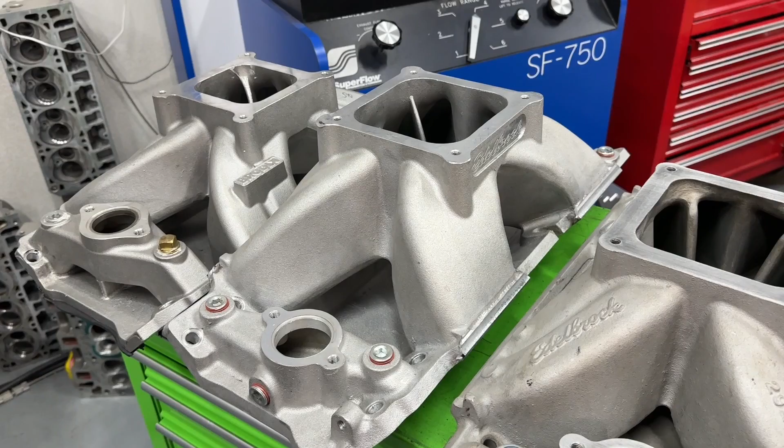Today's video is about the 540 Dyno Mule and which intake made the most power, and how much real power this thing made. For those new to the channel, I have several engines built as dyno mules that we test different things on. I say we, because Gary helps me with it. I test manifolds, oil pans, oil level, carburetors, headers, heads, you name it. Currently there's a small block Chevy dyno mule and now a big block 540 dyno mule. In the past there was a 496 dyno mule, and coming up hopefully soon there'll be an LS 408 dyno mule as well. During all that we test different things.

This video is only about the 540 dyno mule. This engine has a World Merlin 4 block, which is a nice beefy piece. It's got a SCAT 4340 forged crankshaft, 4.250 stroke, SCAT 4340 rods, and Mahle pistons that are used pistons I'd used in a different project. They have lateral gas ports and total seal gapless rings, and those things are amazing because the engine really did seal up well. With the domes on the piston and the head, we get about 12.3 compression ratio.

The heads themselves are much like these, a ProMax 317 head. They were stock except milled down to 110 cc's. The reason for that, well, you'd have to go watch the 496 dyno mule video to figure out, but it was because I was trying to see if compression was worth more power than flow. So I ended up milling that head down to 110 cc's to match a different head that also had 110 cc's. Would I normally do that? No, because it made the alignment and getting this manifold to fit not work out. Matter of fact, I made a couple other manifolds that didn't fit either. But that's the reason why it was 110 cc's. The heads were stock besides also having a 5-angle valve job, and there was no port work done to them.

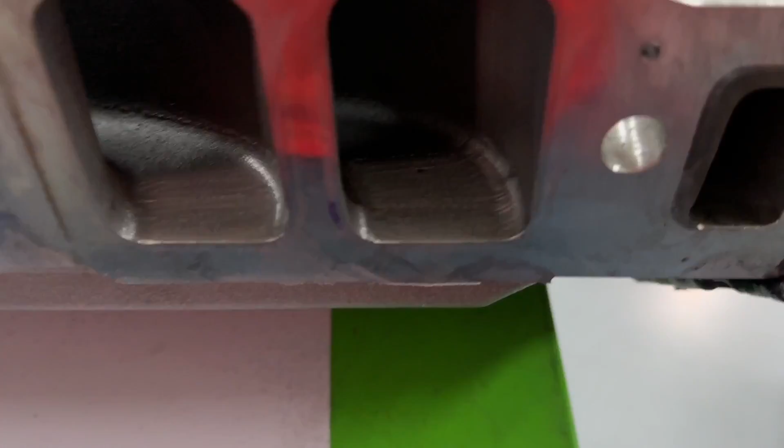The first one is a Brodix, a newer design, their BM 2000. This is a 4150 top, obviously, and it's a rectangular port design. They also make an oval port design, but the head's a rectangular port, so is the intake. This has been modified by me, all I did was round these dividers. It looks fancy, but not really. The other thing, I did port match it to the heads, but I had Gary assemble this engine, and not knocking him at all, it looks like the port alignment, whenever he set the intake on, it's off. So it wasn't perfect, but it should have been, it just wasn't perfectly aligned.

And I don't think it's necessarily anything that he did. It could also have been the deck height, because I'm using a mock-up block to do that, so maybe it was off a little. But the point I'm trying to make is, even though it's port matched, it wasn't perfectly aligned to the heads.

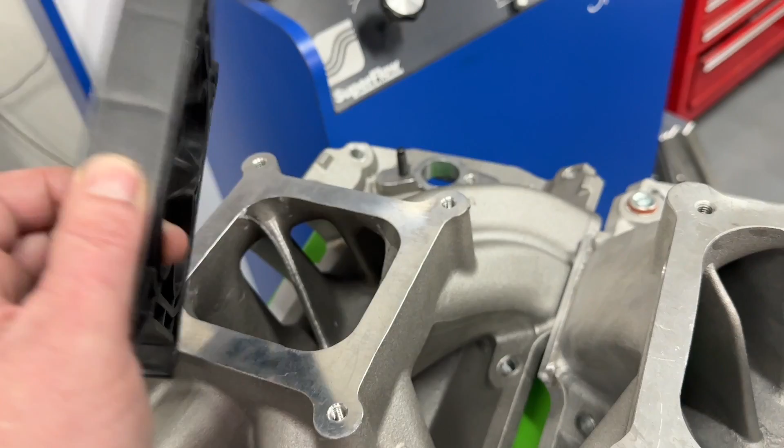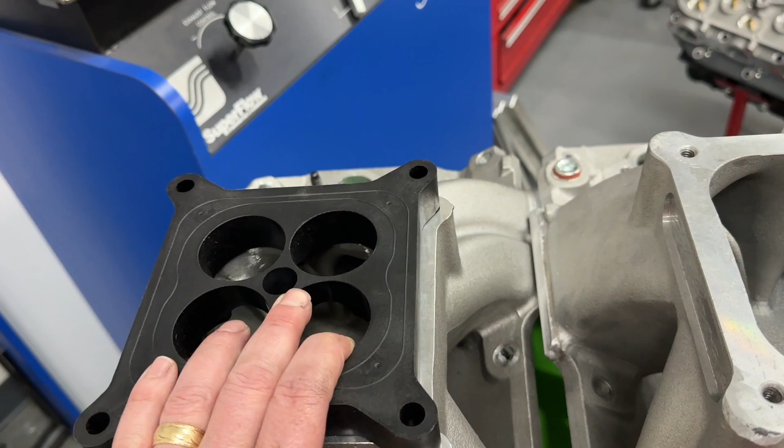Now, this manifold was actually tested two ways too. First thing we did, we used the 1050 or 1000 CFM Demon. We also used this spacer, an AFR tapered 4-hole. This thing has been gold on almost everything. There's only been a few times a spacer has beaten this on a 4150, and it's pretty rare. For the most part, this is nice, and for the price, for the bang for the buck, I think these are like 45 bucks or something. Well worth the money. So it was tested in that configuration with the 4150.

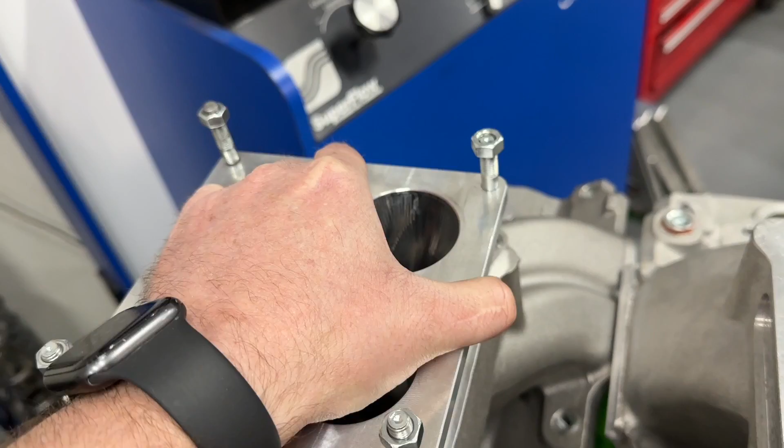But also I used this spacer and the Dominator, and I mean this, and it's so rare for me to say this, on literally everything I've ever put it on has been worth power. This spacer is an adapter. It's a 4150 flange, obviously, and we go to a 4500 carburetor on top, a Dominator that I just told you about.

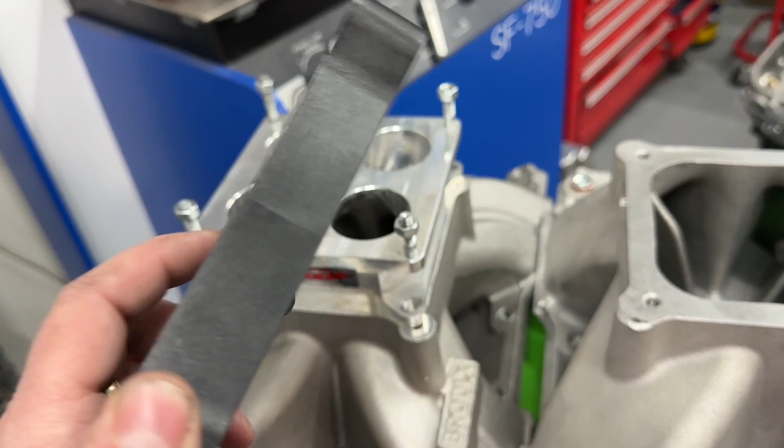Every single time it's bolted on, that makes more power. And I'm not talking like 4 or 3, at least 10. So with this AFR spacer, for the most part, it's better by like maybe 3, and sometimes it just makes the same, some it might make 2 worse. This one, literally, every time of all the products I've tested, it's almost universally, when you put this thing on with the Dominator, has been up at least 10. It's amazing.

So that's why I'm like, the Dominator's like Frank's Red Hot Sauce. You put that on anything, it makes power. And I'll show you in a minute with dyno graphs. Don't worry, it's not just me blabbing. I am going to show you the dyno graphs.

The other intake tested, this is a 2896, Edelbrock's Super Victor 2. This is their more modern design, it's a new one now. It looks like it's been welded because I let someone borrow it, and they needed more material at the top, so they welded up here. But I assure you there's no port work done. However, after I'm done blabbing, I'm going to put it on that mock-up block over there to see how far off it is.

I will say this one did make the most power, though. This is the intake I really wanted to use. This is an Edelbrock 2927, a Super Victor. This is the Super Victor 2. This is the Super Victor 1.

Really wanted to get this to work. It did not work at all because when you set it on the engine, the heads had been milled, and for other reasons as well, it simply wouldn't work. It wouldn't bolt up correctly. There's too much gaps in it. There's no way it would even seal. So too bad. I know some of you are going to ask, why didn't you test a Super Victor? Well, I think it would have been great, probably one of the better ones. Yeah, just couldn't, it didn't fit.

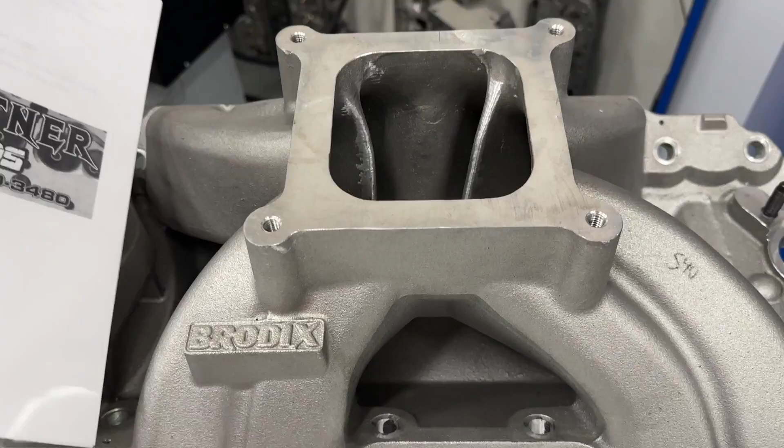But let's get to the numbers, so just to help you out there. The first numbers we're going to show you is from this intake, the Brodix BM2000. Okay, so here we go. I'm going to try to zoom in as much as possible.

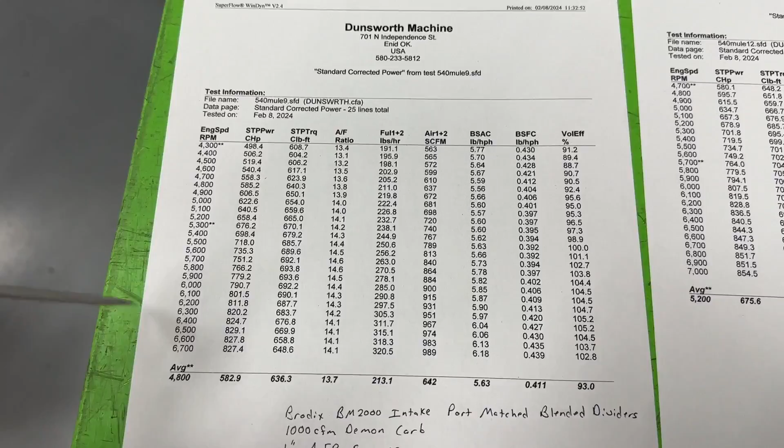You can see it. This is with the 1000 CFM 4150 Demon carburetor, and it had 35 degrees of timing. I'm going to go ahead and tell you, we did not try maxing out timing, and that was kind of a mistake on our part. But the thing is, early on, we do timing.

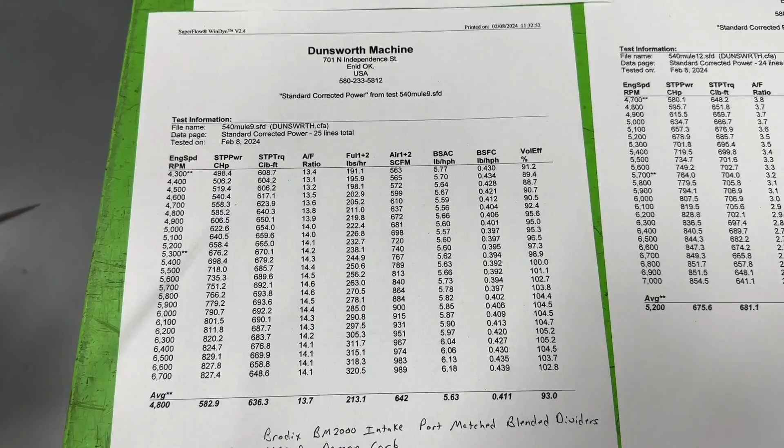We try to see what makes the most power, but that's when we were having oil problems, and you can watch that in the previous video. So we never really addressed that. Once the oil got all taken care of, we were on the crappiest of the intakes that we tested.

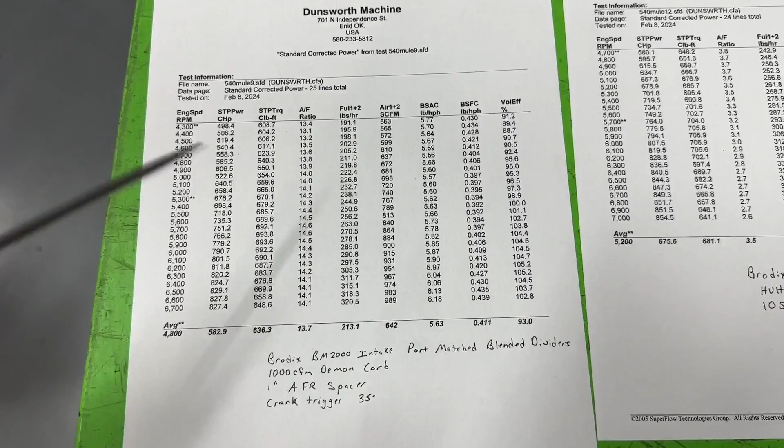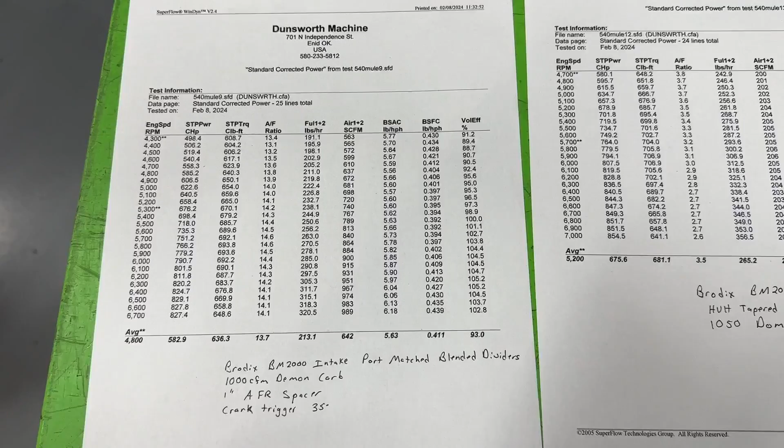So it's like, yeah, maybe we'd add more power because we only tested 35. Let's say we went to 38 and gained 10. Well, we didn't have the better one on, so it's like, why bother? The next time we go to the dyno with this, I'm going to try maxing it out to optimize its tune. There's nothing wrong with 35 degrees, I don't think it's way off from where it would be. It might be down 10, but it's definitely safe.

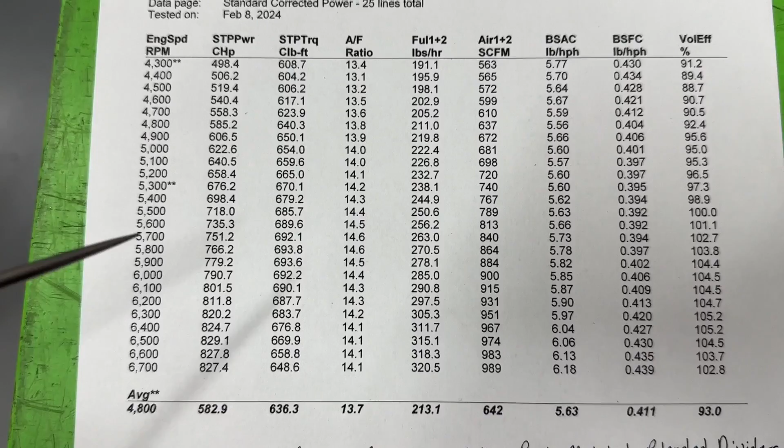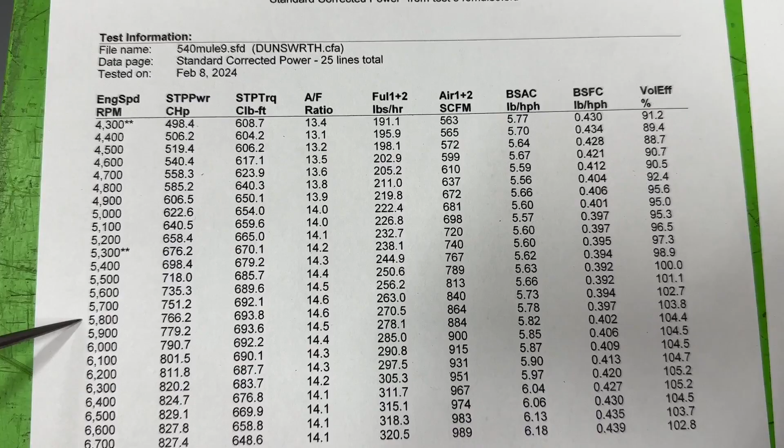So here we go, here's your numbers. Remember, this is 1000 CFM 4150. It made 829 horsepower at 6,500 RPM, and 694 foot-pounds of torque at 5,800 RPM. Not bad, really, when you think about this.

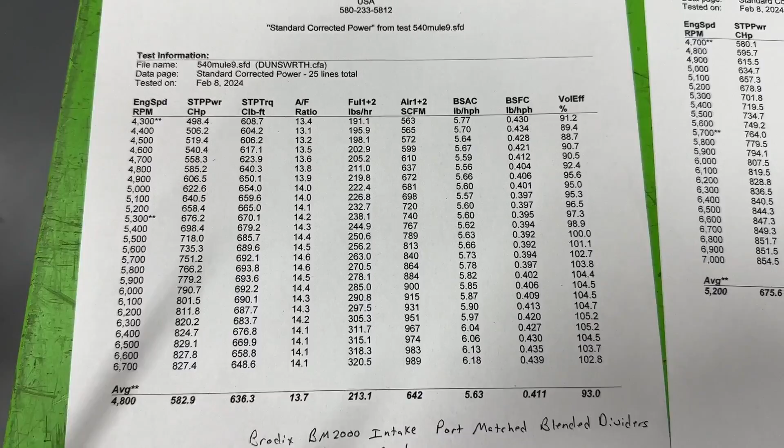And when I was watching this, I was like, that's actually pretty good. Because if you remember when I was talking about my 540 that was dyno tested for the Engine Masters Challenge, it made way more torque at the lower RPMs, but it did not make this kind of power. It only made like 810. Same carburetor, by the way, too.

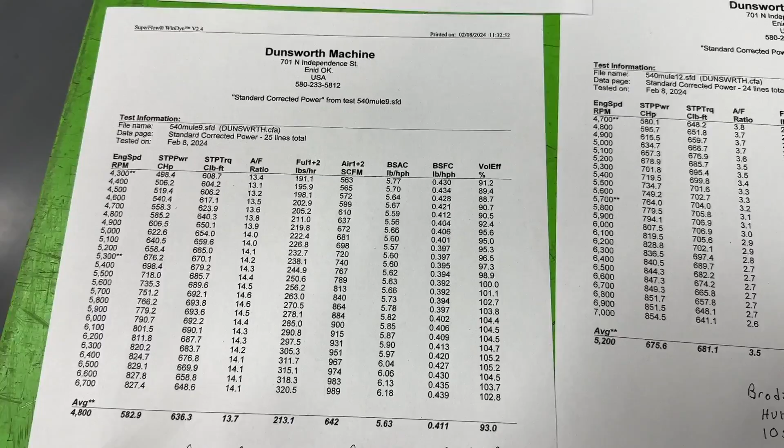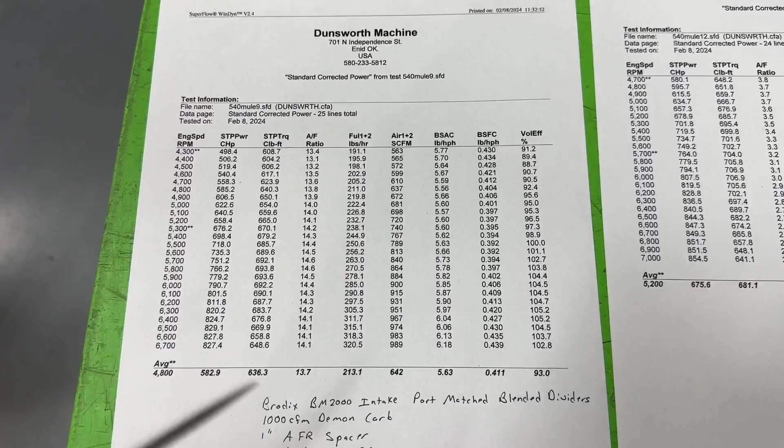And you might be asking yourself, why didn't you pull it down to a lower RPM? One, this is more of a bracket style engine, so I think it's pointless to pull down at the lower RPMs because most bracket cars do not start at 3,000 RPM. They don't have a 3,000 stall converter. The other thing is, this is never going to be a tow vehicle that tows with 110 octane, you know? So there's no point. This is more of the range it would run in anyway.

So good numbers for a baseline, 830 and 694. But same intake, remember that same BM2000, but now I put that adapter on with a Dominator. Watch this.

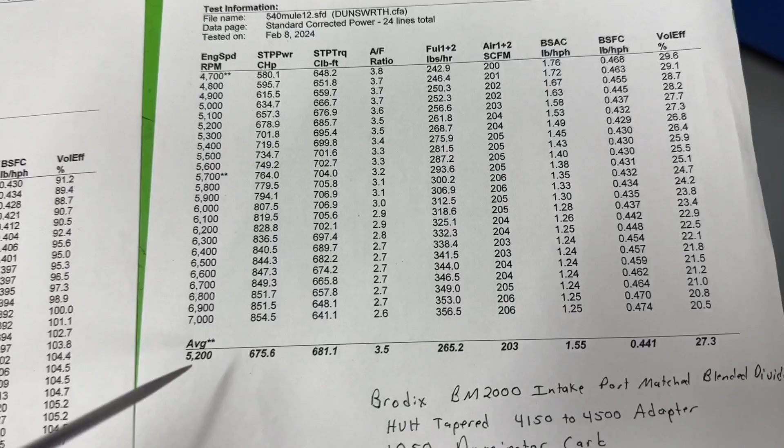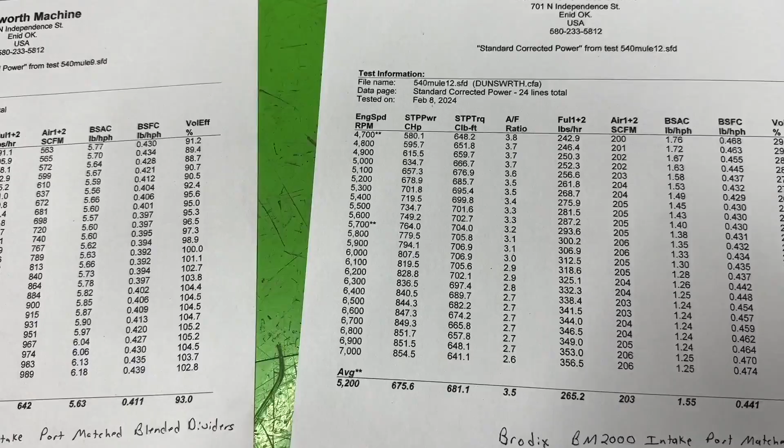Boom. Now 854.5 horsepower at 7,000. So it raised its peak from 6,500 to 7,000 RPM with the Dominator carburetor, and also went from 830 to 854. That's a 25 horsepower gain from the Dominator. So yes, I put that shit on everything.

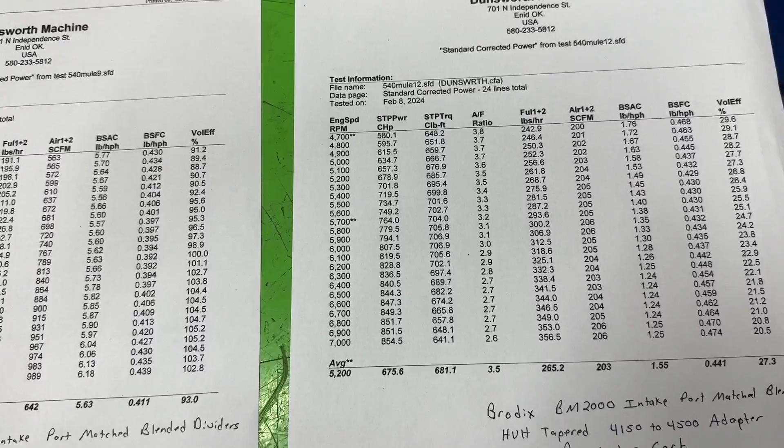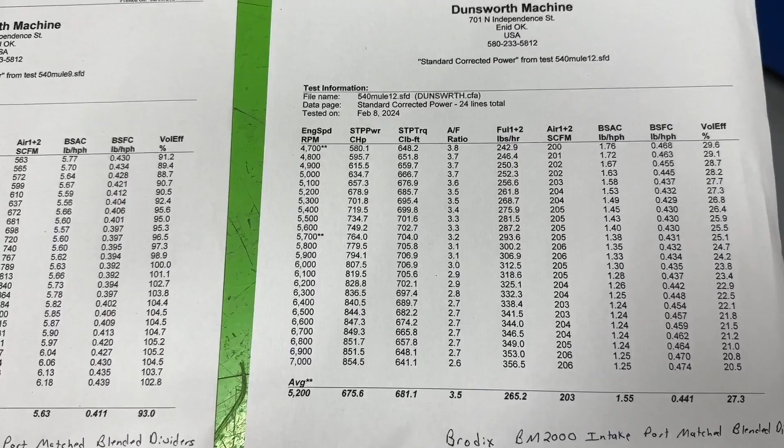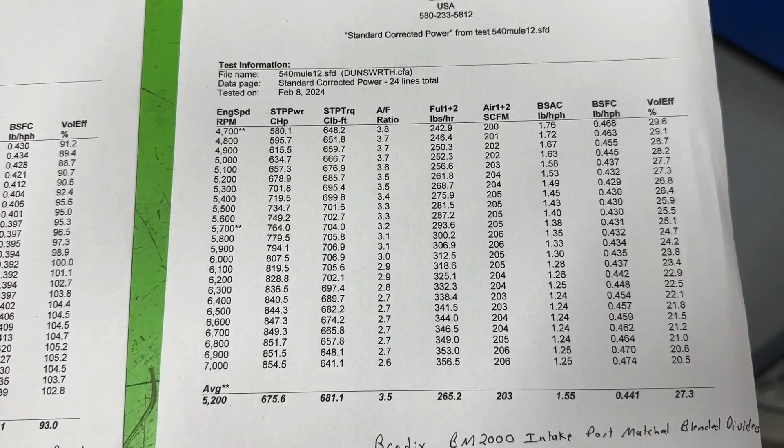707 foot-pounds of torque, up from 694. There's no way you can argue around this. That was a win, that is a gain. And by the way, it's only a 50 CFM bigger carburetor. Much more power.

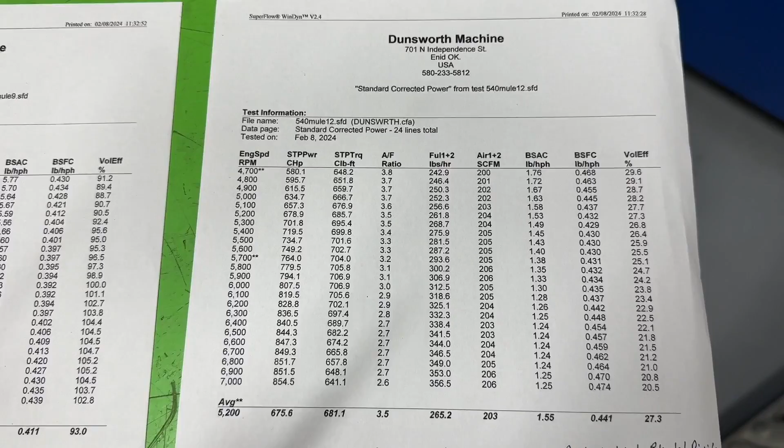So the next intake we went to was this one. And I want to show you some of this. That's the reason why I have the mock-up block here. This is that 2896, but I want to show you this.

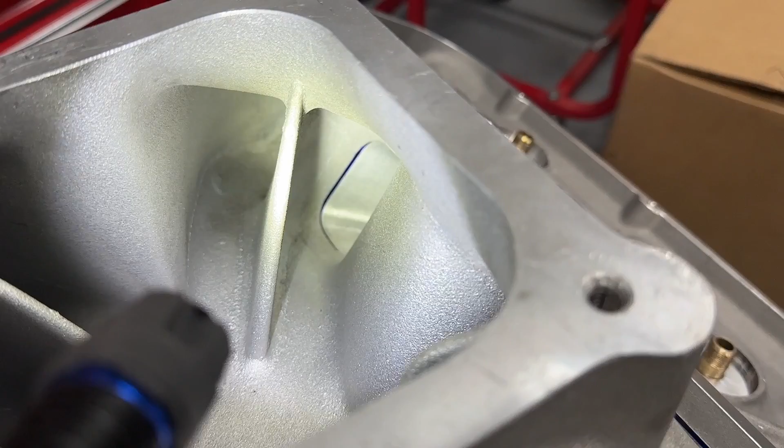Look down that runner, sorry about the strobing effect. There we go, see that gap that you got right there where the cylinder head kind of meets where the intake's actually overhanging the head? Well, that sucks. It's like the whole thing got core shifted on this runner, and it's opposing one over here, because you could see it again.

The others will be perfectly aligned almost, but not those two. And I mention that because there's no way you could fix that, at least like shifting it to make it line up better. Just isn't going to happen, it just is the way it is. So what I'm trying to say is 2 of the banks aren't perfect. The other 6 were pretty close.

Now top and bottom, not at all, because this has not been port matched at all. However, this was ran with a 2-inch 4-hole tapered spacer from Procomp. So yeah, I know it's a cheapie, but it's what I had, and well, it made some more power.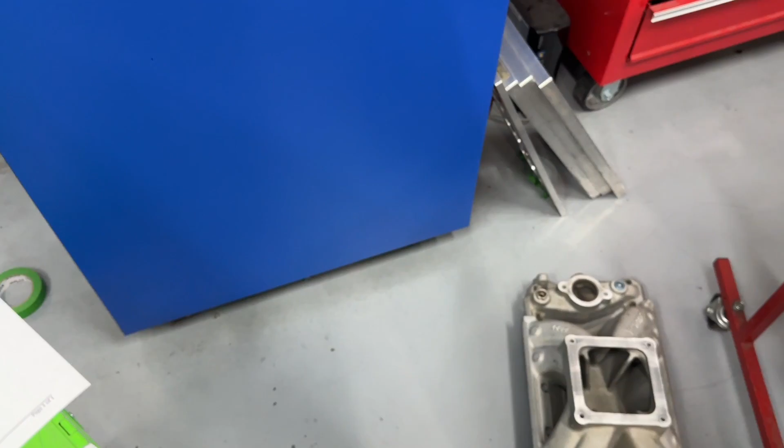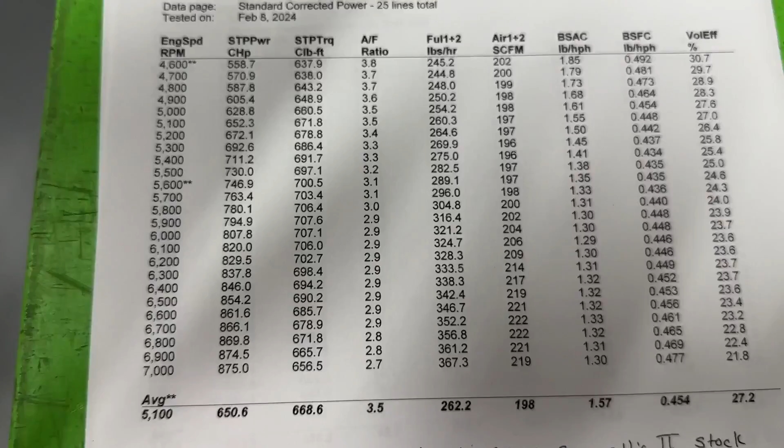So here we go back to this. Here is those numbers, same Dominator carburetor, no jet change, none of that. Let me get my, there we go. 875 horsepower now at 7,000 RPM. That's a gain of 20.

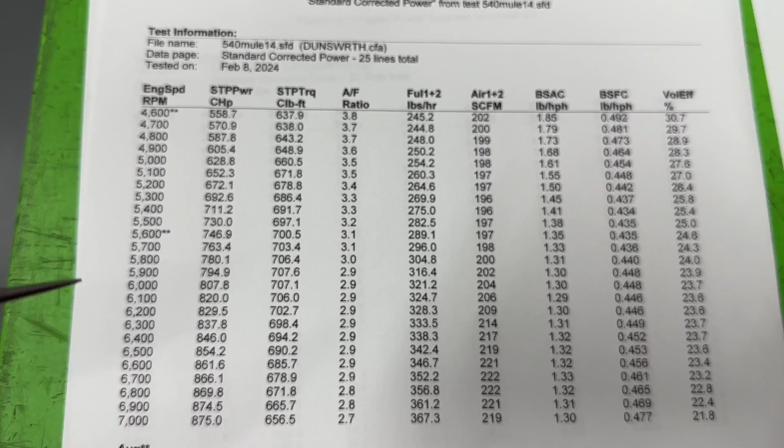That's big. Torque though, now this is where it gets interesting. Its torque is 708 foot-pounds of torque at 5,900, and it was making 707 before. So it only gained 1 foot-pound of torque, but it gained 20 horsepower.

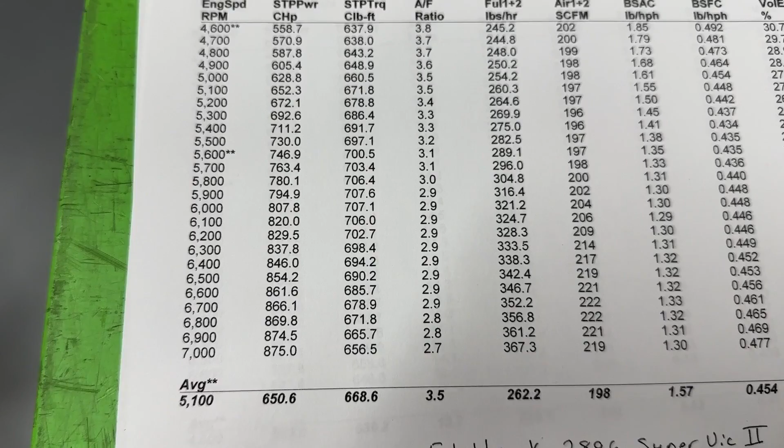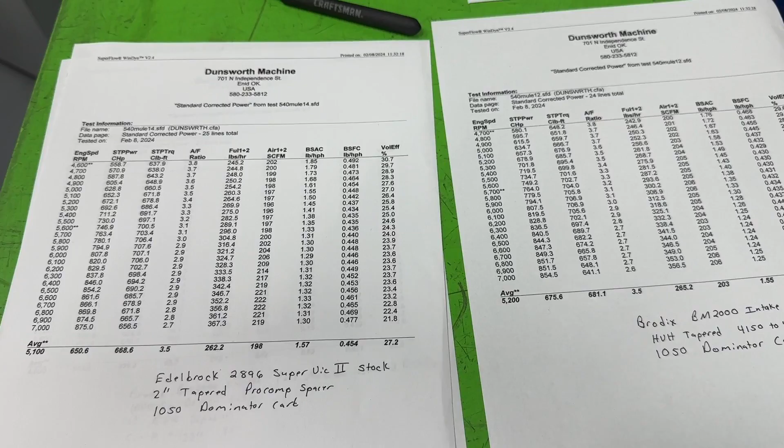Now here's something I can say for sure in general about the intakes that I've tested so far, because several of you know I've tested several small block Chevy intakes and big block Chevy intakes. This is, I can almost tell you, a general rule: the more power your engine makes, the bigger the difference the intake manifolds make.

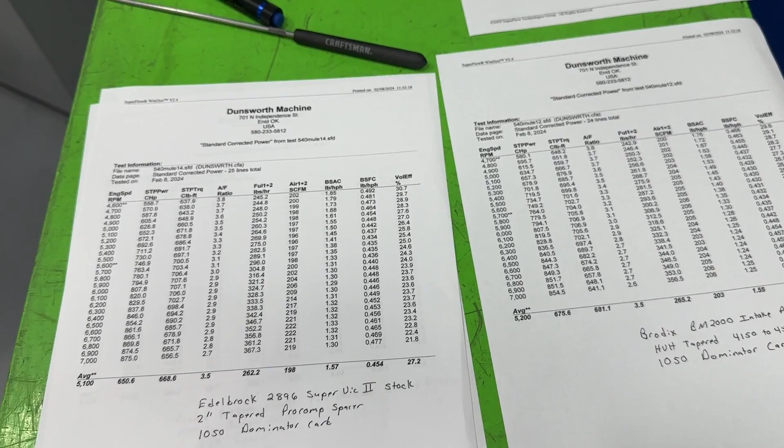So for instance, when we were on the small block Chevy and it was only making 550 because they had the AFR enforcer heads, you might switch an intake from a really good one to a really bad one, and there's only maybe 5 to 10 horsepower difference. This, we instantly saw 20, because this baby is making almost 900.

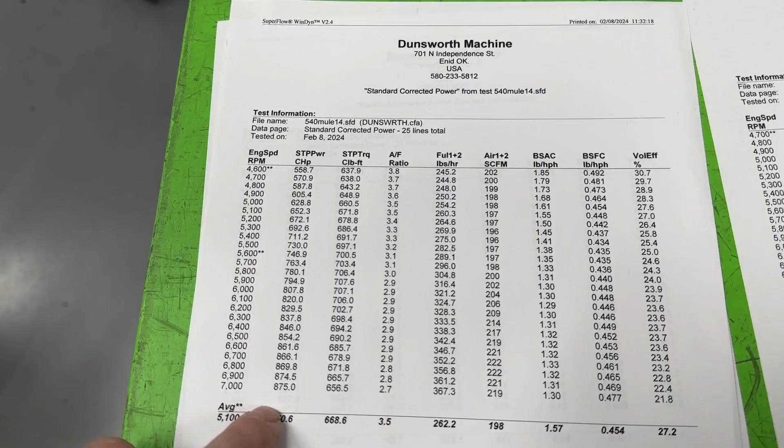So we're at 875. And like I said, I really wish we'd leaned on it at this point, because I think if we'd gone after the timing, it probably would have pumped it up.

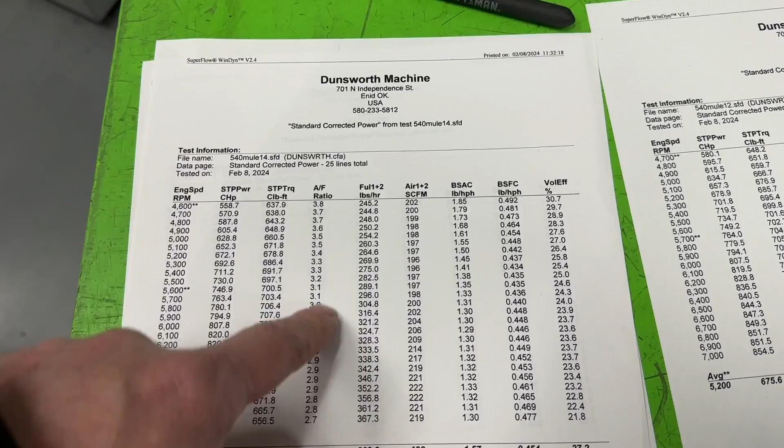You might say, well, your air-fuel ratios look completely wrong. That's because the air hat isn't on. This is measured, the O2 reading sensor isn't on the sheet. So you can kind of tell from looking at your brake specifics, it's not that bad. They're in the 440s. So yeah.

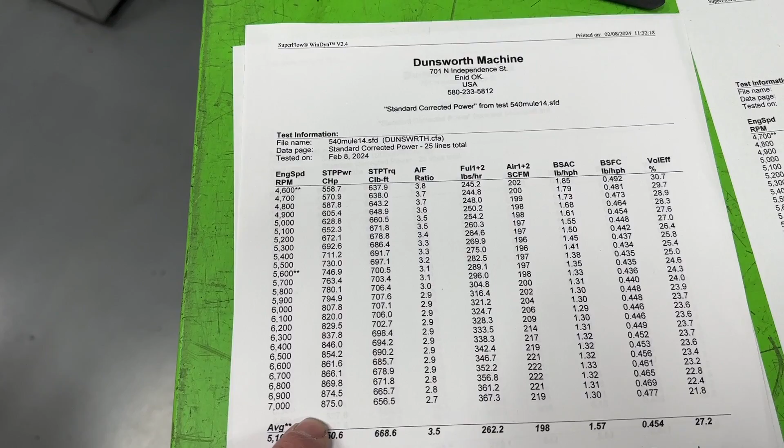Anyway, probably if we'd gotten after it, maybe an 885, which is still outstanding. There's definitely more room to improve on these, and I can't wait for later times. But this so far is right now where we're at.

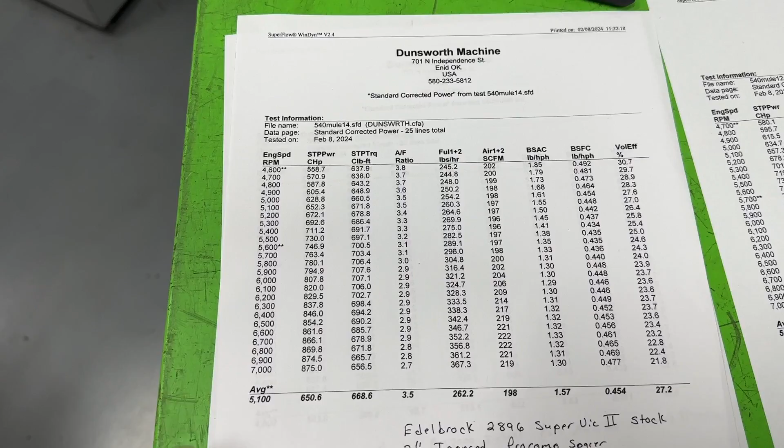You might say, why didn't you go to a higher RPM? That's the other thing, we probably should have on this one. We never did go beyond 7,000 RPM on this intake manifold, and really we should have.

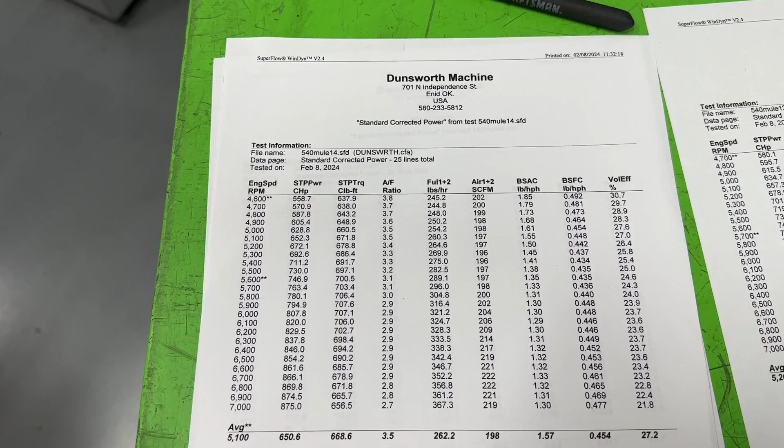But also we're stud mount rockers, don't forget that too, and they are the Comp Pro Magnum rockers, so they're the steel 1.7 ratio. We probably should have gone to like 1.72 and see what it did.

But this is the next intake, so this is the final one that's on there still to this day. This is that Brodix HV 2002, the Turtle one. And it was a 4150 intake manifold, but we ran the adapter and ran the Dominator, so it was running the same Dominator as what we had on this.

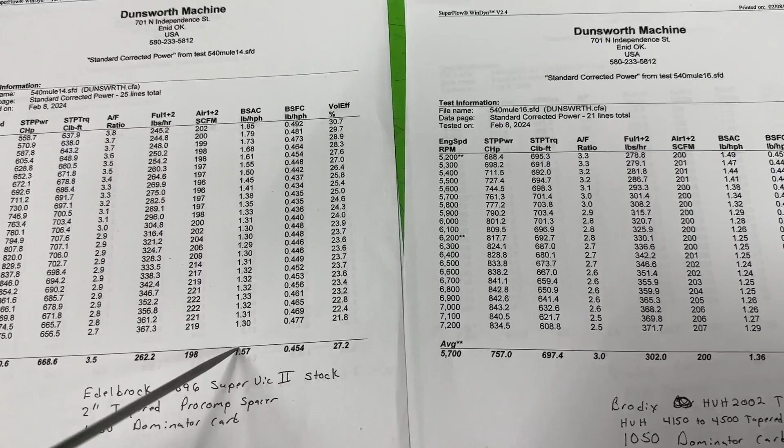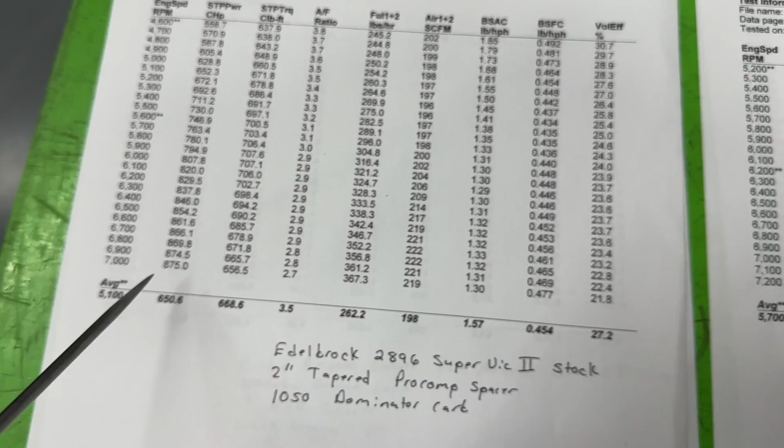Let's look at the peak numbers to begin with. We went from an 875, this one thing brought it down, to an 843 at 7,000. Quite a huge difference. This is what I mean, the intake differences are larger when you're making more power, and that's a huge, huge difference. So it lost quite a bit using this.

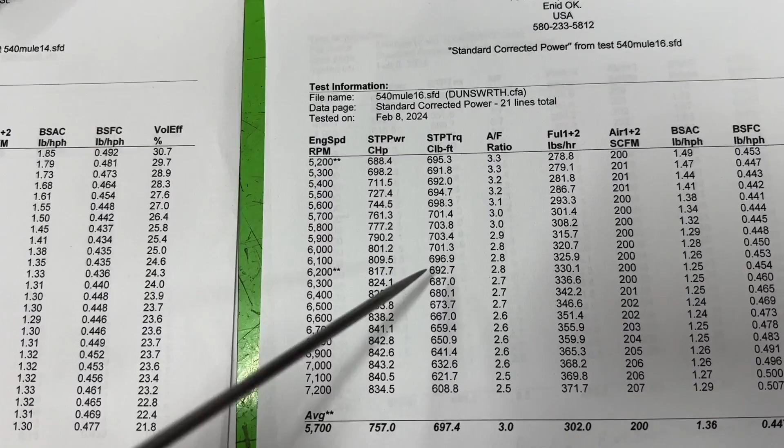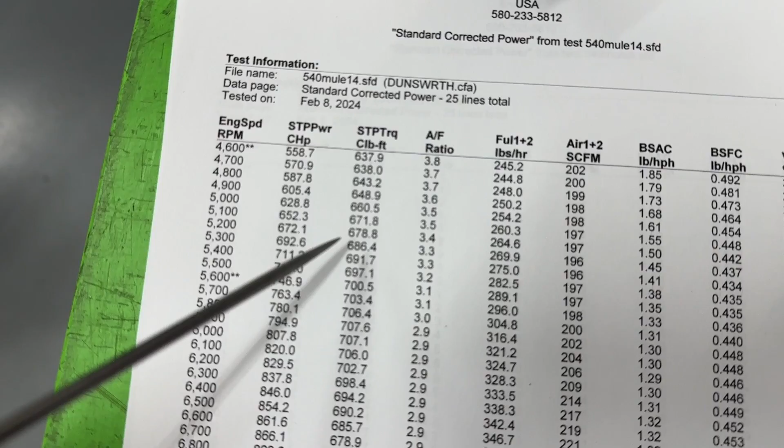Now what's interesting, if you look at the torque, it was also down at peaks. So if you look at peaks, it only did 704 to 708. But look where it starts - at 5,200 it made 695, and at lower RPM it's 678. So with the lower RPMs, had we pulled it lower, which again, no need, this was much better. The Turtle intake is better at the lower RPMs.

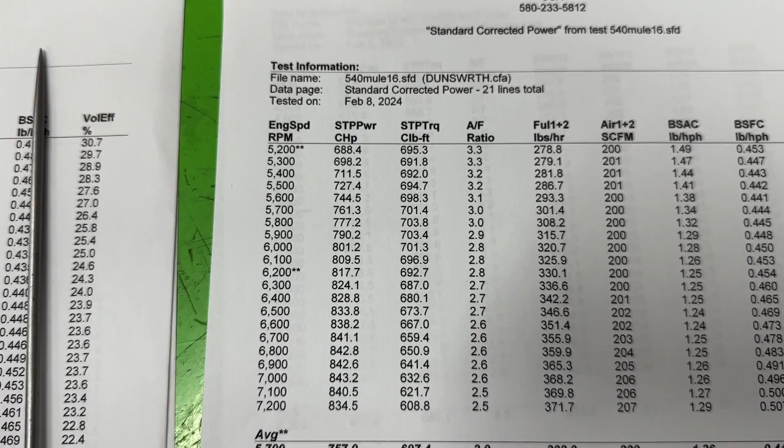No need. So that kind of wraps up all the intake manifold testing that was done, and hopefully it gives you an idea of all the stuff and how that all played out. So if you want to see a better view, pre-order the books, or just get the text version if you do have them on your phone.

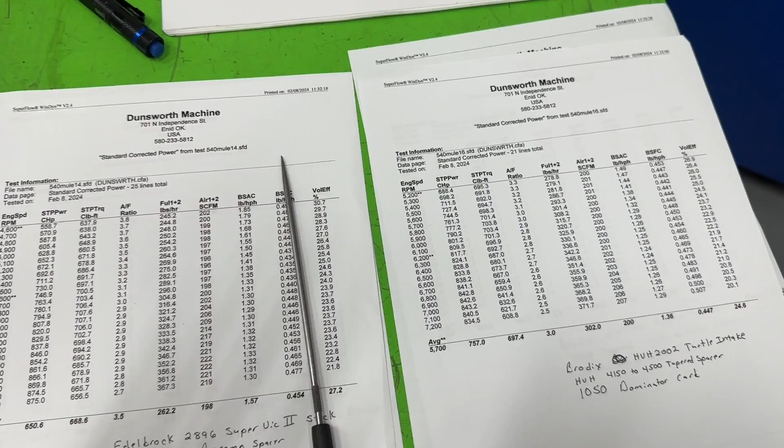And I should point out one other thing I didn't mention. We did try other intake manifolds. Like I said, I tried that one that physically wouldn't fit. He also had, and I really, really wanted to test it, a Profiler Sniper Junior, which compared to that one would have probably been the better one. I think we would have hit some major numbers. Absolutely would not fit, because the heads on there have been milled to 110 cc's.

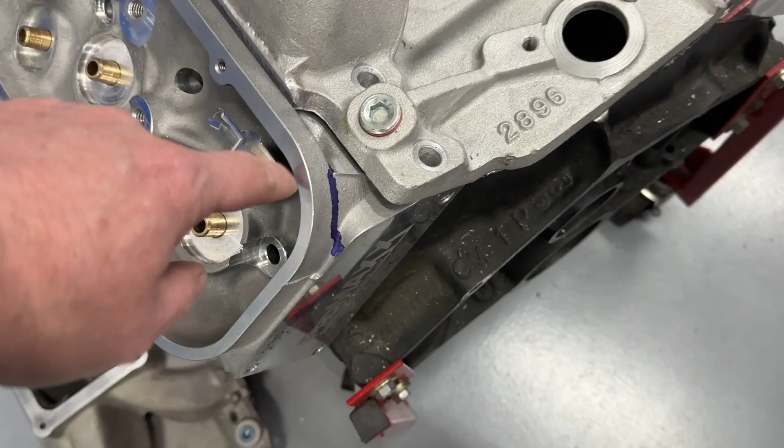This valve cover rail right here on the Promaxx sticks out so much anyway, which I really wish they'd have a notch, a V-cut here that goes up further. Because of the milling, it absolutely will not fit. I would have had to butcher the intake, and it wasn't my intake, it was the customer's, Dunsworth. So I didn't want to. He said, yeah, you can run it, but he didn't want me to modify it to make it fit, and I don't blame him.

So I didn't get a chance to run that, which is too bad, because I think that one will be the winner. I plan to do other intake manifold tests with it obviously. I would love, love, love, love to do a tunnel ram test with that as well. Because for those that don't know, the small block Chevy was dynoed last week, and we tested 3 different tunnel rams on it. So to do the tunnel rams on the big block Chevy, cat's meow.

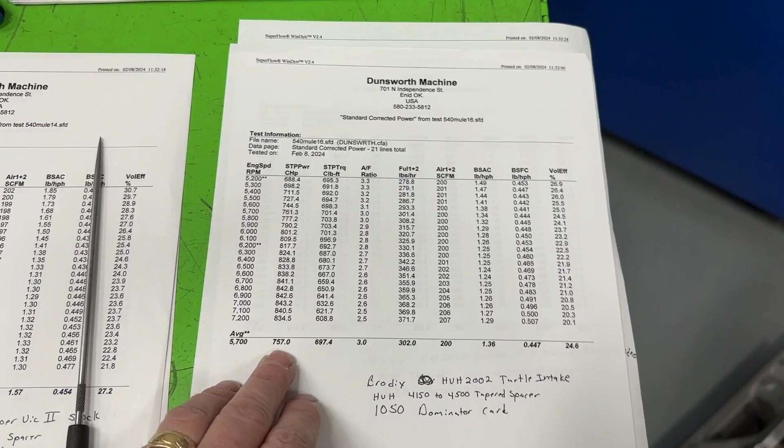That would be really, really neat, and I'd love to test that. But the next time it goes on the dyno, probably what's going to happen is we're going to use this turtle intake again because it's already on there. First thing we're going to do is switch oil pumps to the gear rotor oil pump from Titan, dyno it. Then we're going to switch to the Moroso oil pan, dyno it again. And then, time permitting, I'll put that baby back on it and start adjusting timing and see what we can get.

I think with the better oil pan and oil pump, maybe we'll get to maybe 890 and maybe crack 900, which is outstanding for the amount of pieces that are here. It'd be really, really cool.

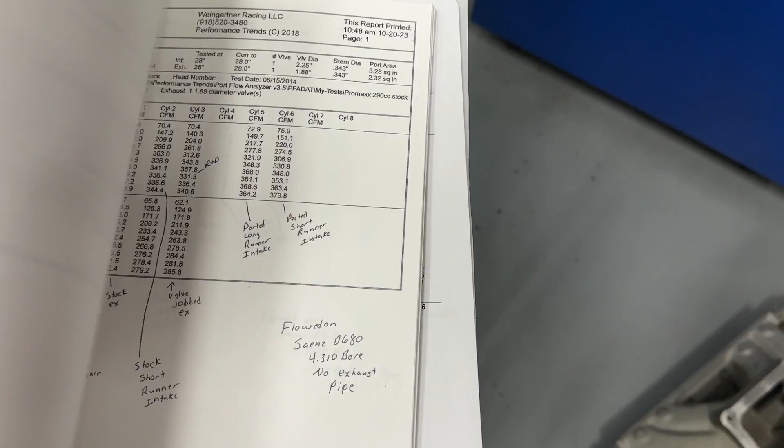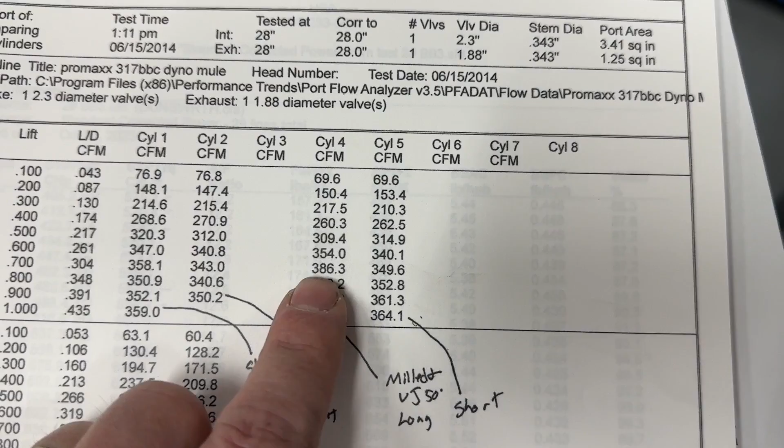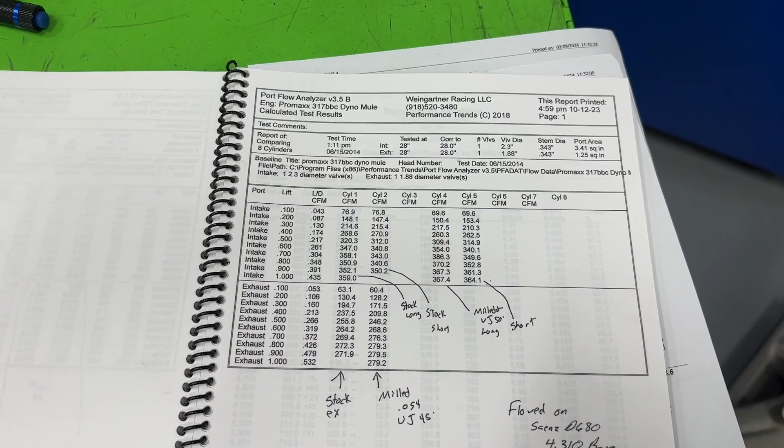Nope, that's the wrong head. There it is, yeah, this is it. It only flowed 386, and the short runner only flowed 364 at 1. The low lifts were pretty bad, it just wasn't that good. Small head, 317 cc's. For a 540 wanting to make more power, it just isn't there. So anyway, that'll be changed too.

Hopefully you guys got something out of this video. Thanks for watching. Remember, I'm no Superman. I do not port cast iron heads, and I appreciate every single one of you.